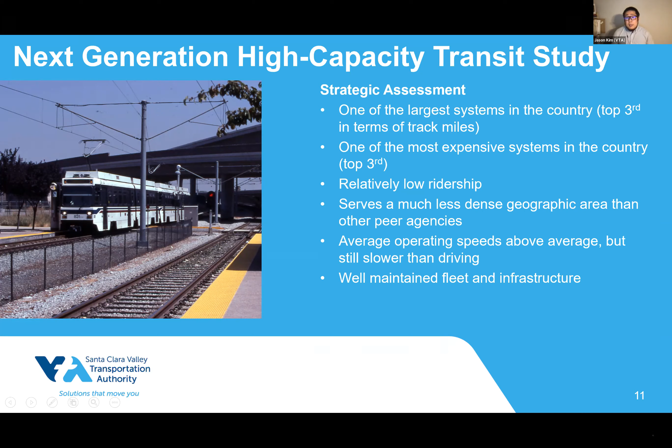All this is to figure out how technology is going to help the VTA system going forward. I think the thing that we're all interested in and excited about is automation. When we expect trains and buses and other vehicles to be operated without a driver, without an operator, whenever that happens, that's going to help us improve our operating costs because we no longer have to pay for an operator. It may also help us increase how frequent our trains come because we can operate more trains since we don't have as many operators needed to fulfill those needs.

But it actually may not help in a couple other ways. It probably won't actually help us increase our ridership, because ridership is heavily dependent on the land uses around the system. Someone mentioned Reid-Hillview, the potential development there. Once that expands, that will actually help ridership for the Eastridge extension. That's the kind of development that we really want to see up and down our entire light rail corridor.

We also don't think that changing to automation is actually going to help our system speeds. The key is that a lot of our slow speeds throughout our county are due to all the at-grade intersections we have that light rail crosses. One of the great things about the Eastridge extension is that it's fully grade separated. So the actual light rail speeds on the extension are going to be some of the fastest throughout our entire light rail system when it's built.

For the actual timeline of implementation we're looking at, the typical useful life of a light rail vehicle is 30 years. That's the anticipated amount of time you're going to have your light rail vehicle before you essentially have to get rid of it and replace it with something else. We bought our light rail vehicles around the year 2000, so we're anticipating 10 to 12 years of additional life from today in our light rail system.

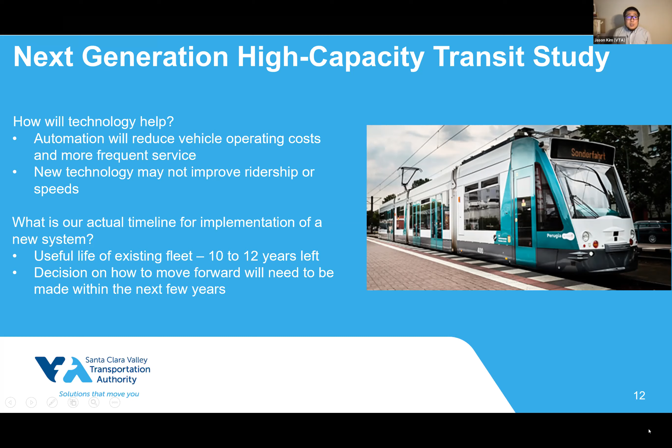If we go to the next slide, I now want to switch gears and talk about technology, some of the technologies we're looking at as part of this. We focused our technology review on existing modes like bus, light rail, automated guideway transit, personal rapid transit - those are the kind of things you'd see at airports as airport people movers. We also looked a lot into emerging technologies that haven't really been used other places, which some private companies are proposing throughout the country and throughout the world.

One of the key things we looked at here, as I mentioned before, is autonomous operations and how soon some of these different kinds of technologies can offer autonomous operations. One of the keys for us is that recently the city of San Jose put out an Airport, Diridon, Stevens Creek Connector RFI - a request for information - which had a lot of these larger companies submitting proposals about how they would potentially create a connector to connect the airport, Diridon, and Stevens Creek.

Some of the notable names in that were the Boring Company, which submitted something for us to look at, and Hyperloop submitted something for us to look at. So there was actually a lot of technologies that submitted, and we took a lot of that information away to help us figure out what technology trends we actually think are coming up.

If we go to the next slide - some of the keys for VTA is that the trends we're seeing with the industry is that most of these innovative technologies, like Hyperloop and Boring Company, are offering fully autonomous operations, but they require full grade separation. You need completely different corridors, and they can't actually just operate on the roadway how our light rail operates today.

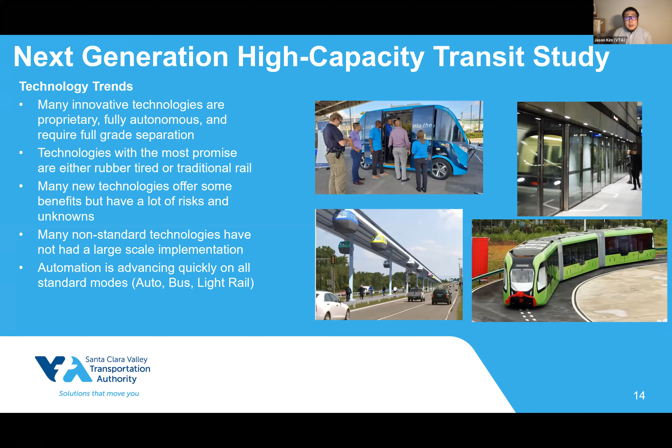So if we go to the next slide, I think all this being said, what we're seeing out of the study is that there's no single brand new mode that sticks out to VTA that checks all the boxes for us about how to move forward. There's actually a lot of different modes that would make sense for VTA to move forward with.

This includes just keeping with light rail and buying new light rail trains, or maybe even converting the light rail corridor to let buses operate on them. These standard modes like bus and light rail are really the things that meet VTA's purpose and need for the light rail system the best.

As I mentioned before, a lot of these newer non-standard modes offer way too many risks for VTA right now to think about. But I think one of the keys here is that we don't want to completely ignore these modes. These are things that we want to keep studying.

Even though they may not be right for VTA's near-term implementation, which I mentioned is about 10 to 12 years from now, they may be ready for future consideration, when we go through this whole process another 30 years from now or so.

As I mentioned before, autonomous operations are really going to come to all different modes that we're seeing. So we're not really considering if a mode or technology is autonomous or not as a big differentiator on whether we should choose it, because we really think these kind of autonomous operations are going to come to everything.

I think some of the keys here for the Eastridge extension is that we're not recommending to move forward with some completely brand new technology that is incompatible with what we're operating today. We don't really see the merit in that.

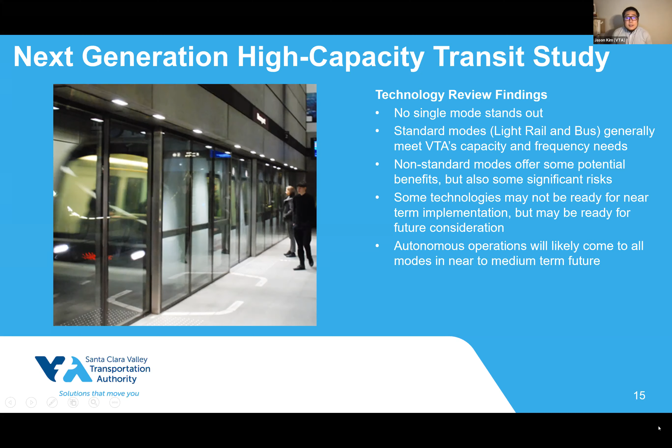With that, I think I really want to talk about the next steps of the study. So David, if you go to the next slide, the next step is really the scenario development process, where we're going to put together a handful of scenarios for the VTA committees and board to consider about how to move forward. Essentially, these scenarios are going to detail ways that VTA can replace, upgrade, and integrate a new or existing mode into VTA's light rail system.

An example of this is we propose VTA just buys a new light rail fleet, replaces the old fleet with new vehicles. This is what the transition timeline looks like. Another possibility is figuring out a way to operate buses and light rails on the same corridors. This is the kind of construction that would need to happen in the first couple of years. This is how many buses we need to buy. Those are the kinds of things that we're looking at as part of our scenario development process.

These are currently being developed, and they should be presented to the Capital Program Committee sometime in early 2021. After that, we'll bring it around to some of the other committees, come back, refine some of those scenarios, and then we're hoping to have the final report complete by spring to mid 2021. And with that, I'd be happy to take any questions.

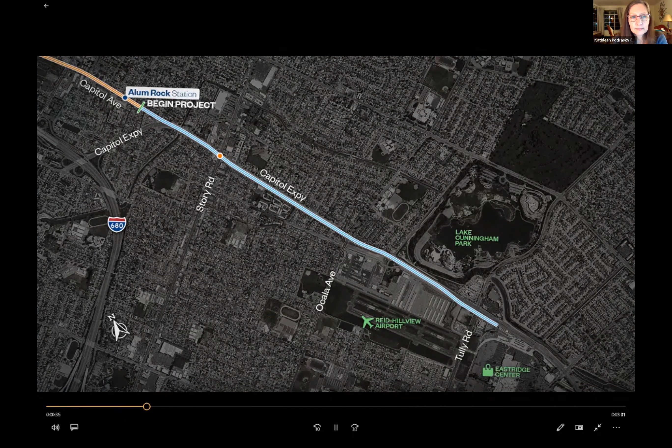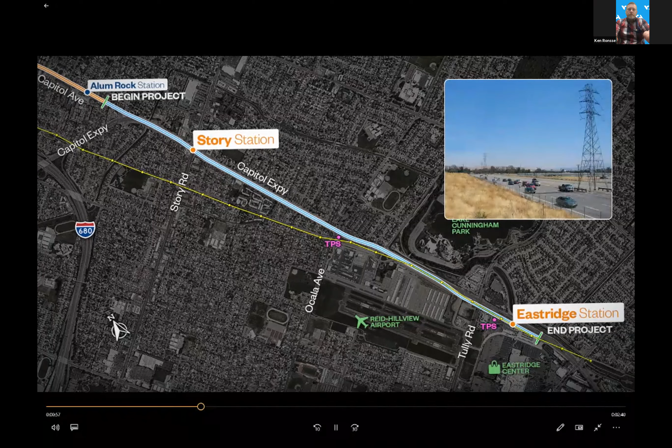The project features include an elevated guideway along Capitol Expressway and an elevated station at Story Road, a street-level station at the Eastridge Transit Center, and two power substations located near Ocala Avenue and Eastridge to provide power to the rail system. A high-voltage PG&E transmission power line between Ocala Avenue and Quimby Road will be relocated from the median to the east side of the expressway to provide room for the aerial guideway.

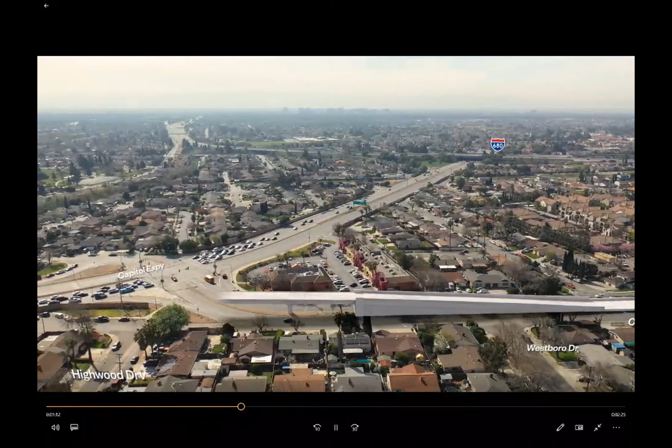The extension begins south of Alum Rock Station and gradually rises along the retaining wall near Westboro Drive, before crossing over Capitol Avenue to an elevated guideway within the median of Capitol Expressway.

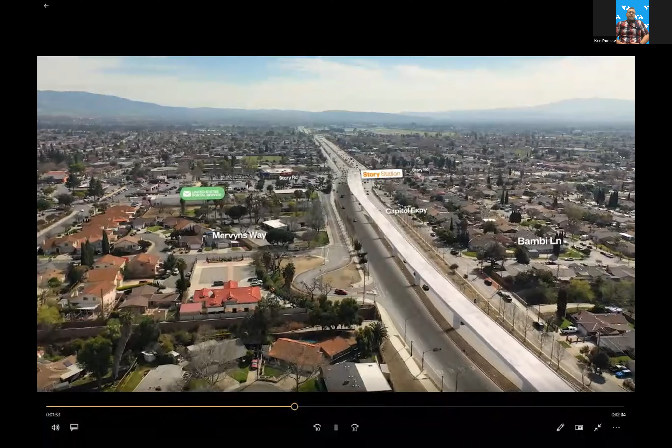The alignment continues via aerial guideway toward the Story Road intersection, where a new elevated station will be accessible from both sides of Capitol Expressway by an arched-shaped steel pedestrian bridge.

The Story Station platforms can be accessed by stairs or the elevator, located on the east and west side of the Capitol Expressway that connects to the pedestrian bridge. A center elevator connects the bridge to the station platform.

The extension remains elevated from the Story Station as it continues south within the median of Capitol Expressway. After Cunningham Avenue, the alignment shifts to the west side of Capitol Expressway, heading south towards Tully Road.

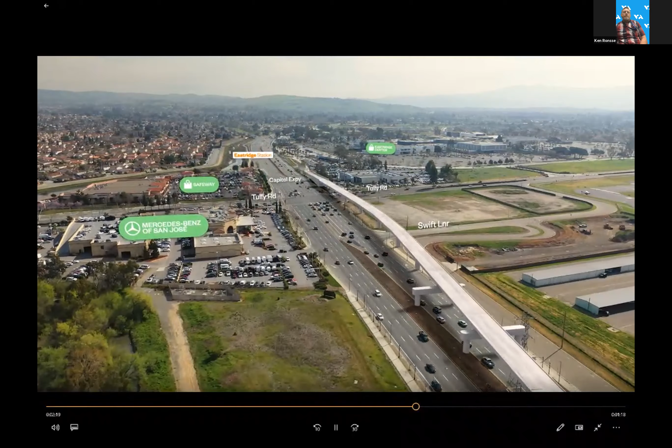As it approaches the Eastridge Transit Center, the alignment crosses over Tully Road on the west side of the intersection before descending to Eastridge Station.

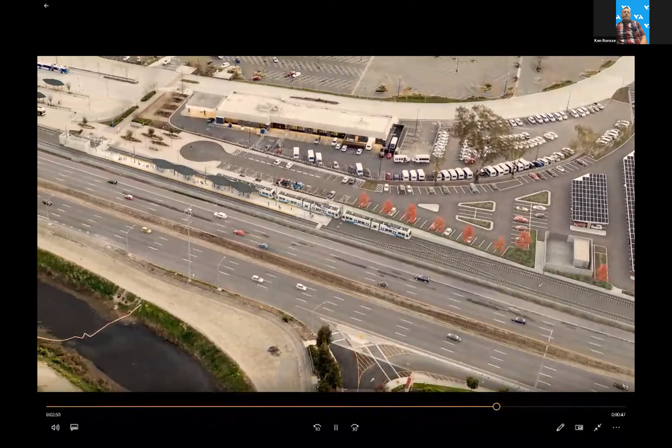The Eastridge Station is a 3-car length center platform at ground level. Access to the platform is controlled by pedestrian gates, located at the north and south end of the platform. The Eastridge Station provides convenient access to the existing bus transit center and park and ride lot.

South of the platform, storage tracks can hold up to 9 rail cars to address peak commute demand.

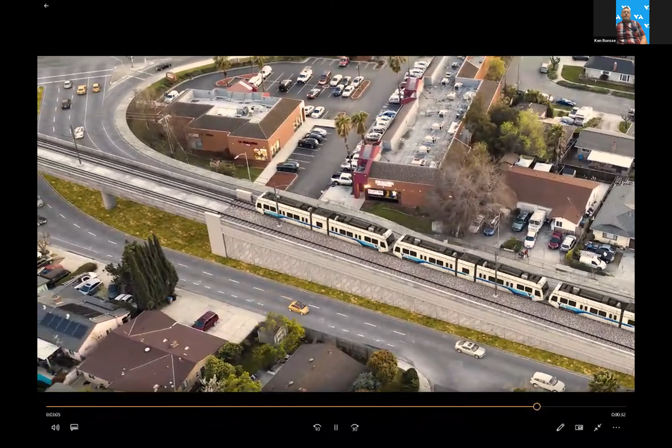The Eastridge to BART Regional Connector Project, when complete, transforms Capitol Expressway into a multimodal boulevard, offering safe connections to BART and other regional transit systems.

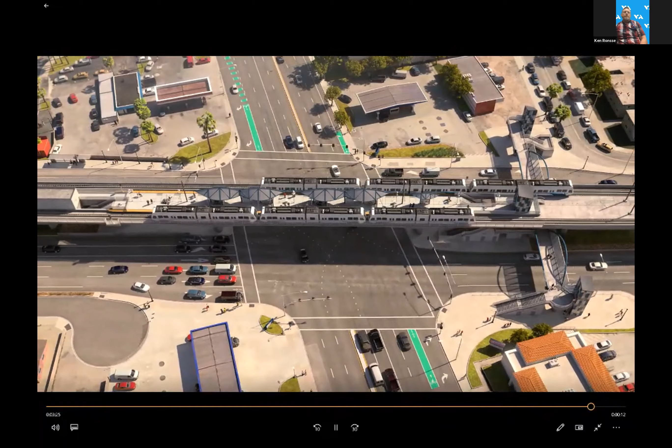That was actually less choppy than in our practice runs. So maybe Zoom in the evening is much better than Zoom during the day.

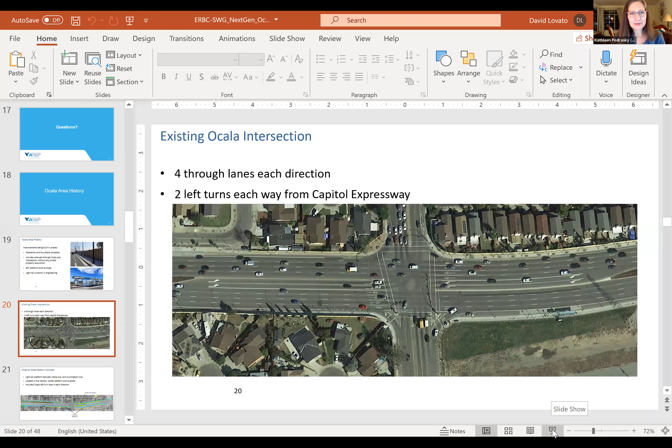Thank you, Ken. So what do you think? Pretty cool. I have one question.

I noticed the person who did the audio did not pronounce Alum Rock correctly, so you might want to change that. Yeah, so typically when people are not from the general area, they don't pronounce words correctly.

Yeah, if it can be changed, there's a couple edits. It was noted. Okay, all right. Yeah, it's kind of like listening to Siri.

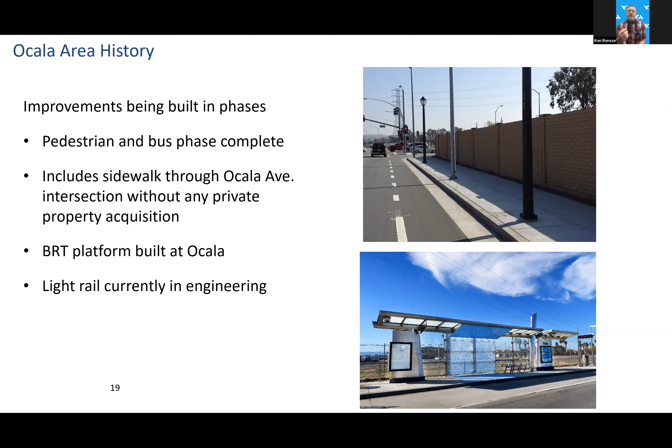So in order to understand the challenges, what we thought we'd do is walk you through some of the graphic information, the exhibits, so you're not just hearing the words and categories, but actually able to walk through with us what we struggled with as a project team, and what the board struggled with in making decisions.

So this is the existing condition today. There are improvements, houses on 3 of the 4 corners. On the lower right-hand side is the area near the airport. We're looking at this with north to our left, south to our right. Look at the left turn lanes - there's 2 in each direction in the current condition.

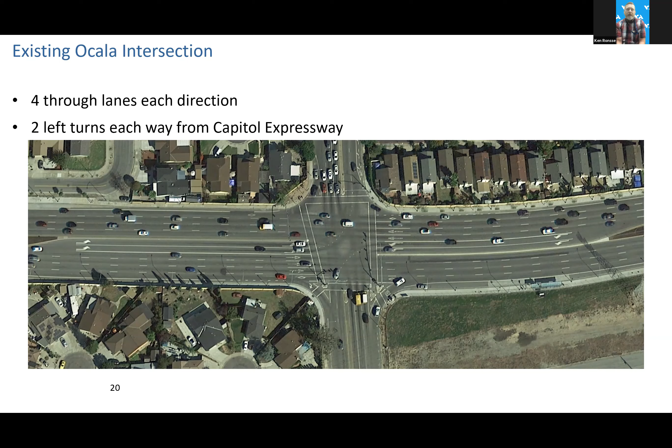So this was the original design. It did have an Ocala platform, located in the median between Ocala and Cunningham, and it had a significant amount of property acquisition. It also had only a single left turn lane in the northbound direction - today there's 2. It took property acquisition of a whole litany of houses on the west side and north side, the northwest corner. That's what was actually approved in the environmental document. That's how it started.

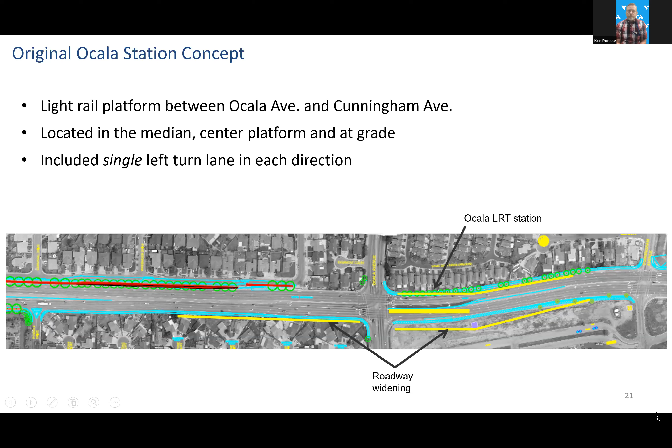The photo on the right shows the property acquisition. It shows the removal of backyards - only about 3 to 4 feet will remain from the new sound wall for several of the homes. As we said, there's only 1 left turn in the northbound direction in this scenario. And those were the impacts.

The value for the project was the ridership. The ridership was estimated at 250 boardings per day. That did not include the Reid-Hillview Airport closing and reconfiguration plan - I listened to the full board meeting, stayed the whole time, and heard the comments and the action, and it did not include that. Even today there's no formal plan about what that development would look like. There's questions about it, and likely it would develop, but there's questions about what it would look like. It's true none of that was evaluated in this ridership, but we're an order of magnitude off.

In our sustainability policy, we have a minimum criteria for a new light rail station: 600 boardings per day. What we're saying is, if we do not receive 600 boardings per day, that station is not sustainable. We don't even mean the construction cost - this is construction cost aside. We can't afford to operate and maintain a station unless there's more than 600 riders per day. This stop had only 250 boardings a day. Granted, that didn't assume any development at Reid-Hillview, but the ridership was low.

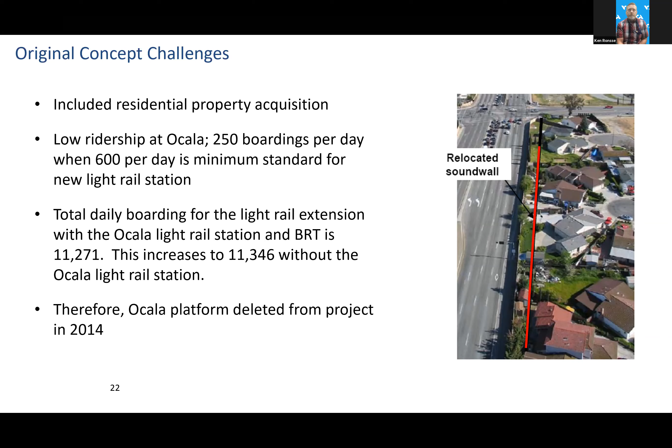So the story continues because it doesn't end there. After 2014, we decided we needed to update the environmental document again to ensure we had good traffic information, and that the document was updated because it had been going through some changes. So we were faced with the other half of the challenge.

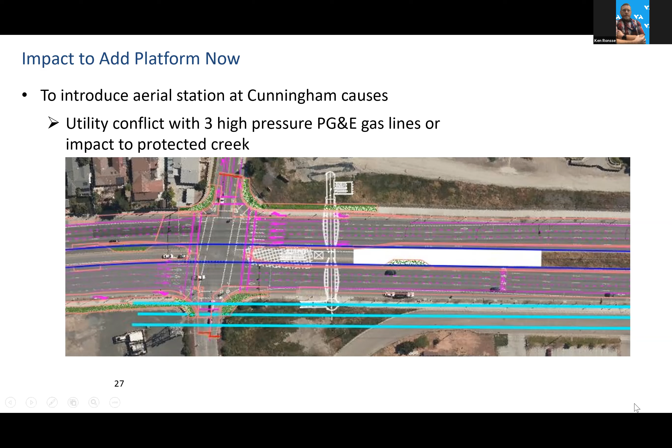Then the challenge comes to this: if we were to put a platform in, what is the appropriate space for the platform and for stations? And Jason, who's a planner, knows better than I do, but as we said early in the presentation, ridership actually goes down when you add a platform—think of First Street. Ironically, if we were to get rid of stations, ridership would go up. If you could speed up light rail by not stopping at stations and be faster, more people ride it. So interestingly enough, you start to have a challenge.

So what we're showing here is that if you take the middle of the property, and the airport were to develop—using that as a measure, and I appreciate there are other properties outside the airport that would use Ocala Station, but equal distant to our left is Story—if you take the new development at the airport, the distance to Eastridge platform and to Ocala platform, if it's all the way to Ocala, is equal distance from the middle of the property. If you move it to Cunningham, it's even less difference.

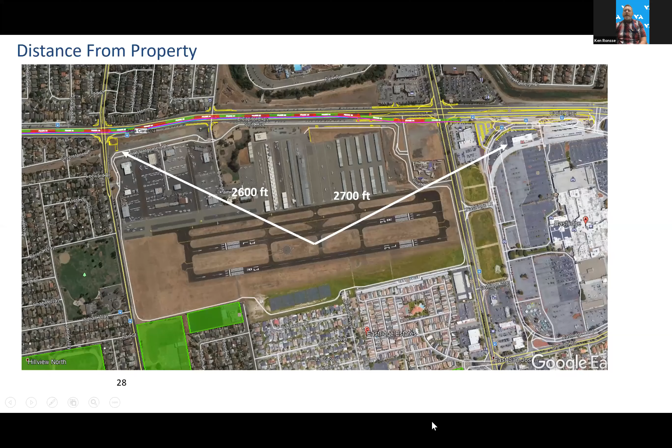And I guess I would say, I think there's two parts to it, Craig. So if we were to go back, can we go back a couple slides? And then I would like to share my screen if I could at some point, because I have a couple of graphics on my screen. So if we go back a little more.

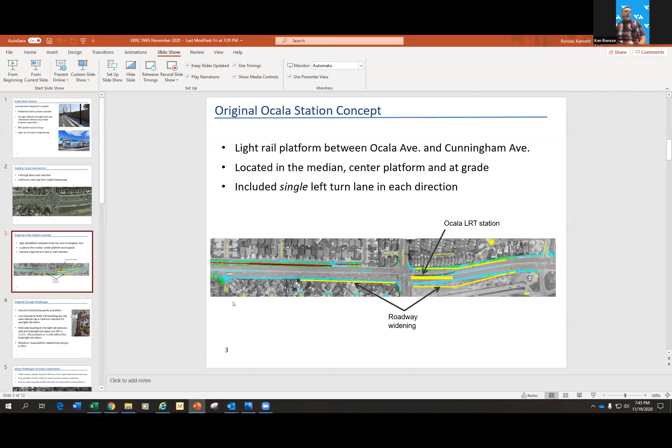So let's just say, for the sake of argument, that the ridership is extreme and there's a lot of ridership. The board would still have to decide then, is it worth putting a station in to take all these homes, or take away 2 left turns when the distance for those homes is roughly the same distance as Eastridge? And that's the struggle that the board has, is that to add a platform is a great thing. An aerial station is a great thing, but it doesn't come without a cost.

And that cost is not just money. We haven't even talked about money. I mentioned 25 million, but I'm not even talking about that. What I'm talking about is there's a lot of people that would say, you may want that platform, but these are our homes. And others might say, if you don't take our homes, that's fine, but I like my left turns. The problem is you can't have an aerial station without deciding which of those you want to take away. It's not possible.

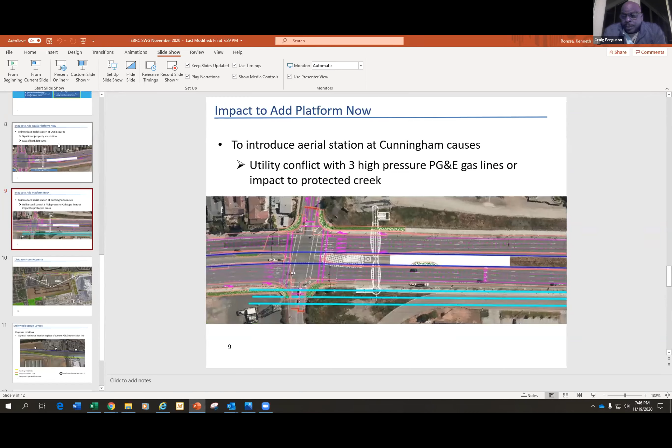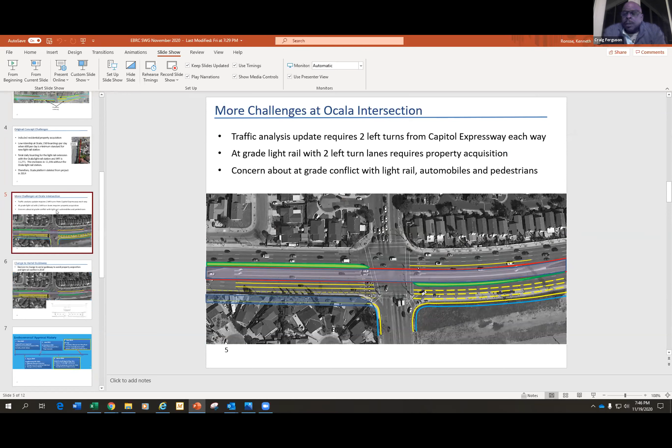Ken, I realize this is difficult, not an easy decision to make. For one, I'm glad I'm not the one who has to make it, but I'm advocating for the community. The supervisor will have to make that decision, but I feel strongly it's needed. The other participants can jump in and let me know if they think it's way in left field, or if it's a necessity as well. I know there's some people we can't see, and I don't live in that area, but I'm advocating for the folks who will be in that area.

Craig, I think that's actually—so what should the process be, maybe? Staff, I don't think our job is to try to convince anybody of anything. Our job is to present the circumstance.

What the board was faced with so far was a ridership of 250 against a criteria of 600. I'm not a modeling guy who does the traffic models, but there is no approved project now for the airport.

What they talked about Tuesday was agreeing to develop a plan that would set the approach for how one might decide what a new future would look like, if there is going to be one. They would set the plan, and nothing would happen until 2031. So we know that's kind of the fact. But let's assume there's going to be a station there—a build out of a development.

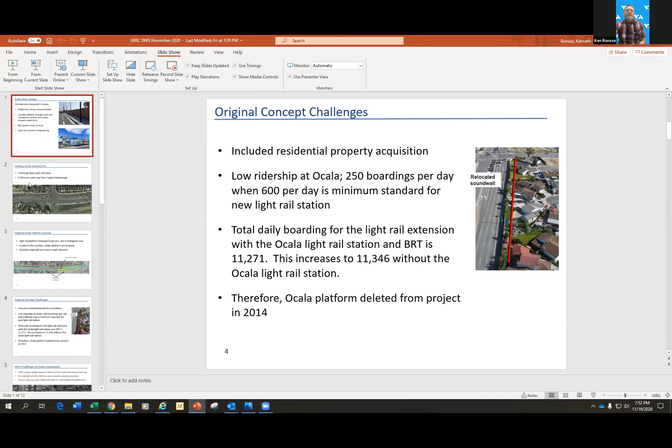Okay Ken, thank you for your presentation. First, just to go back, this project has been going on for what, 20 years now? So there's been delays since day one. Secondly, I think all this is affected by where we're going, but my main concern is what is the difference between the Story location versus the Ocala location besides the home acquisitions?

Number one. Number two, in the Story location, has anybody taken into consideration the activity that goes on there? For me, that's a big one, because if I had to catch the light rail and go down to that station, I don't know how I would feel getting on and off there, knowing what goes on behind those apartments in the corner there. I can't even remember the name of them, the Knox or whatever, the apartments that are there in that corner area.

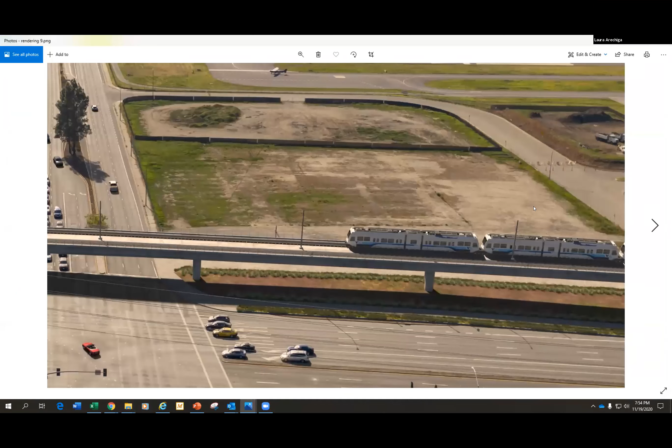There's a lot of activity that apparently goes on there. I need a clear explanation from you in order to sell that to my group of neighbors, because some of them would use that particular station. I'm sorry, I'm confused, which location? I think it's the Colmar Apartments area right there. That's the location where the station is going to be. Isn't that correct?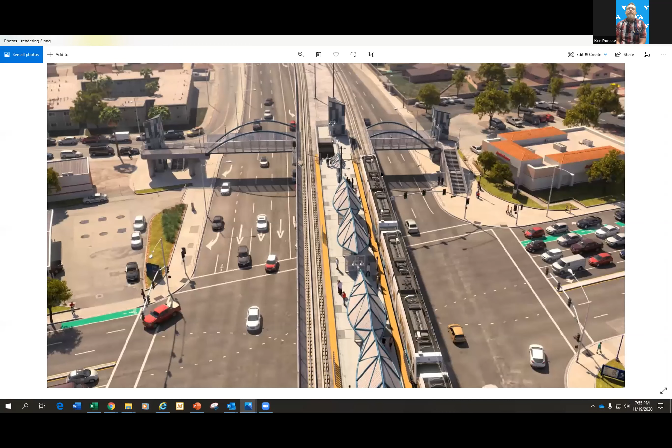Yes, so the station is on the right side of this screen. The station is right here at Story, with the overcrossing on one side touching AutoZone, and on the other side near the current supermarket, or the gas station and the gas market. So this is the orientation for the location of the Story median station.

And that's where my concern is, because the apartments right behind there, there's a lot of gang activity, number one. There's a lot of shootings there. I mean, there's just a lot there. And only because I know people that have lived in that particular area that have had to leave. That's my main concern, is safety, number one, and lawsuits, if you're going to be spending all kinds of money.

Because you're concerned about the land acquisitions and changing the whole thing. If that's what the board is concerned about, they need to be concerned about lawsuits that are going to come into place if somebody gets hurt in that particular area. That's a big thing for me, safety. Yeah.

That's something we can share back at the PAB meeting next month. Yeah, because with all the conversations and meetings we've had, nobody has ever responded to the fact that safety was a concern. It's just, wait a minute, let's just plop it right here because we don't have to acquire any homes, we don't have to spend any more money.

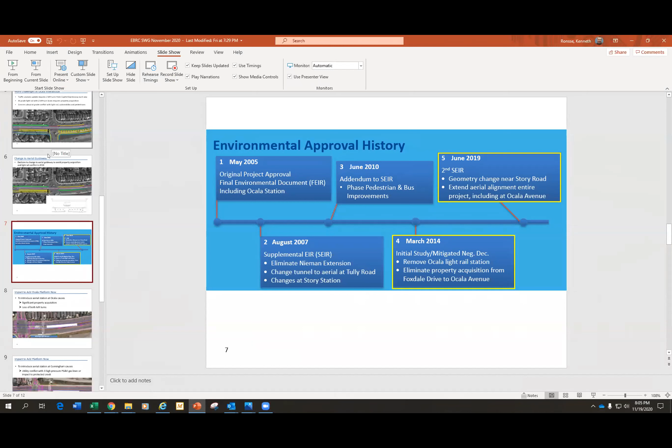So you guys have a small room right there to make the station. If you make the station in Ocala, I don't think you have to, like what you say, buy houses and things like that, because you're not going to need that much room to make the station there. And also, if you guys move the stop or the station for the bus stop right there, you don't have to buy any houses right there.

And also, for me, because I've been walking my dogs almost every day there, Ocala and Capitol by Eastridge, I see that when they open those two lanes to make a left turn or right turn, whatever, the traffic doesn't respect pedestrians there. The traffic is so fast and things like that.

You guys should stop or cancel one or two lanes there, one lane, make a left or something like that, make turns. Of course it's going to be low traffic, and there's going to be more people there getting the bus and things like that.

And you're talking about the amount of people getting the bus there. I don't know when you guys got the number of people, something like that, but I see many people there. And also, you try to get the bus, or for Story Road, for the train, or Story Road or Eastridge, to get a bus, you know how much time it takes you to wait there for the bus? 15 to 20 minutes. And it's a long time for people going to work or things like that.

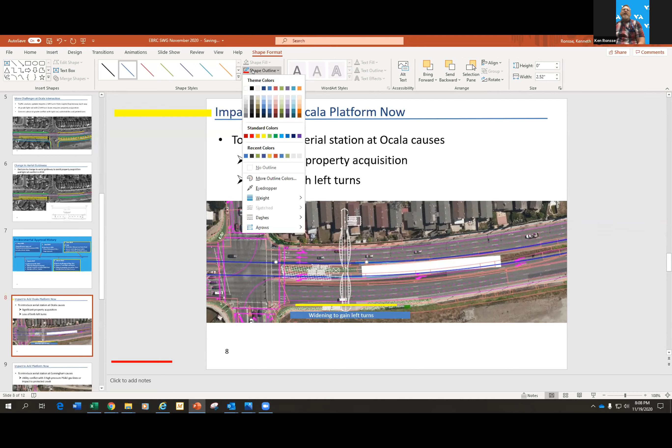Okay, so what I'd like to do, if you'll just indulge me, the most important thing to me is not where you land, but that you're informed. That's what I care about. So I want to talk about a couple things I just heard to make sure you're informed. Is that fair? Sure. So I'm going to walk through real quick, forgive this, but I think I'll try to take advantage of this opportunity to show you.

This is not theoretical, this is actually the aerial. This is actually our line work for the light rail. This is actual design. Everything that's not white is the actual design today. We took the actual design from Story Road, which is the minimum width, and overlaid it with the white. So everything here is actual.

If we were to bring the station at Story and copy it down here at Ocala, this is what you would get. Here's the challenge: this yellow line I'm bringing in, that is the median of the road with the station.

There are no left turns. The left turns are gone. You can't fit them in. The current alignment with no left turns, this is the curb, this thing right here is the curb, right there. Let's assume you want the station, and you're okay with no left turns. Okay, then you're fine, because the other side of the road is right here in the red.

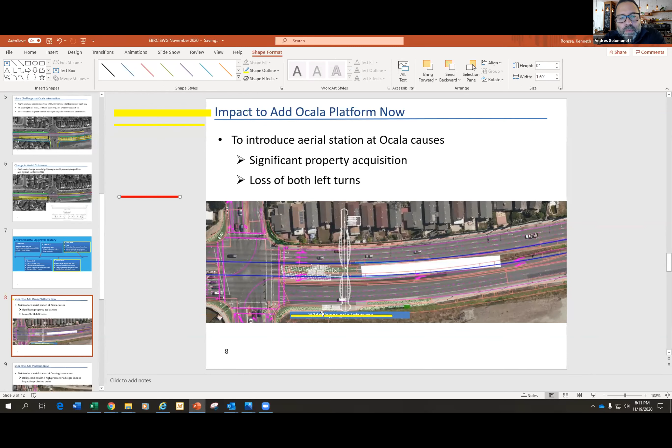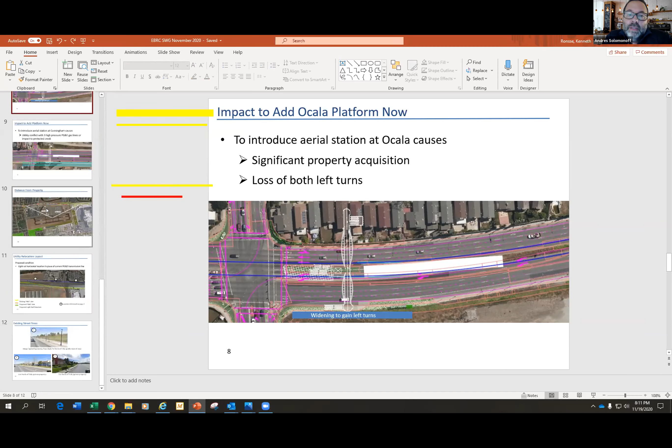Andres: I don't have a question, I just want to express an opinion. It seems to me like implementing a shuttle bus, a dedicated shuttle bus at Ocala, would make a lot more sense, just because of the complexity of putting in a light rail station there, and the unknowables we have. We don't know how big, and we truly don't know whether Reid-Hillview Airport is going to be closed, or how big the neighborhood there will be. Having a dedicated shuttle bus that runs maybe every 15 minutes to either Eastridge or Story makes more sense.

And then the second thing I wanted to say regarding Laura's concerns: I would frame it as an issue for the police and not the VTA. I'm not going to have gang members telling me or telling the VTA where to build the station. I would present it to your community members as something the police need to address.

I have already addressed it to the police at prior meetings, but I've never received a clear answer. That's why I want to know from the board if that was also part of their environmental document. That's where I'm coming from.

Okay, and we can point that out. I don't know the answer, but safety is a part of it. So let's pull that out and make the environmental document available to all of us. And if you want, we can maybe walk you through the environmental document as part of one of these meetings, just so you know what's in it, how it's made, what the components are, and that you're fully informed. We can do that, walk you through it, make sure you have a copy, and guide you through it, because that is our job, right?

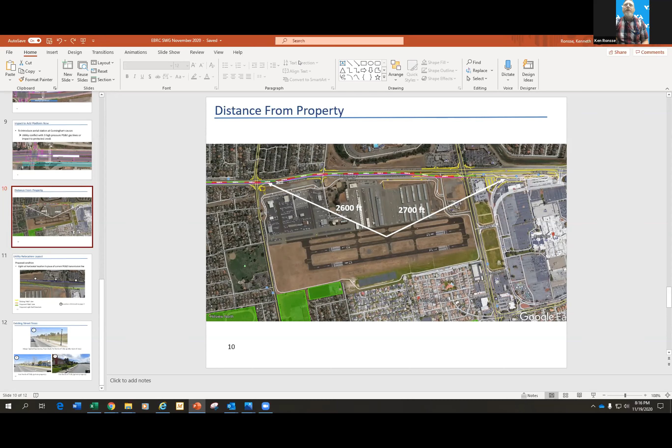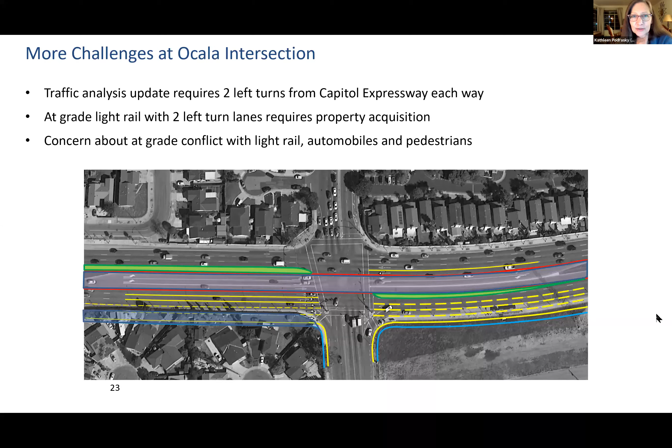I'm here. Okay, guys, I did make a note about sharing the environmental document, and I do have it. If you've gone to our website and saw the tab for the stakeholder working group, I have a tab just like that for the environmental documents, so I have them in order. If you go to the documents page, they're listed by type, and it's a little harder because you have to know exactly what you're looking for. So I prefer to have them in order so you have an idea of when it might have occurred—that way if you don't know what you're looking for, you can go by the when.

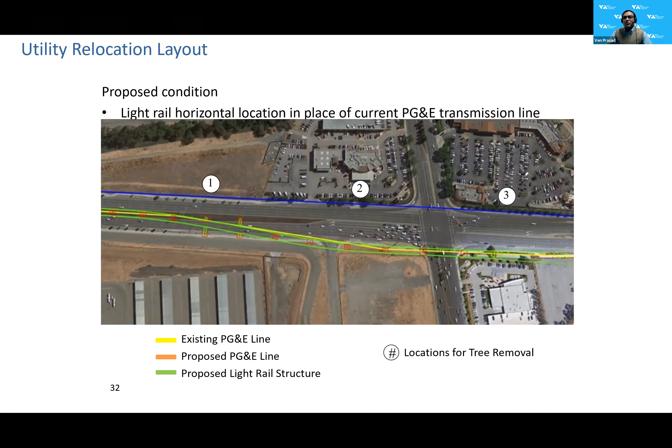So if you see, 3 is to the south of Tully, 2 is to the north of Tully. I want to go to the next slide here and explain more on this one.

So like I said, we are relocating the transmission line to the east side of the Expressway. PG&E's new requirement, because of all the fires they've had over the years throughout the Bay Area and other locations within California, is that we cannot have any trees under their transmission line. So on the east side, what you see in these pictures 1, 2, 3 are the locations where we have existing trees, and PG&E has been asking us to remove these trees. We're looking at somewhere around 50 to 60 trees that need to be taken out as part of the project.

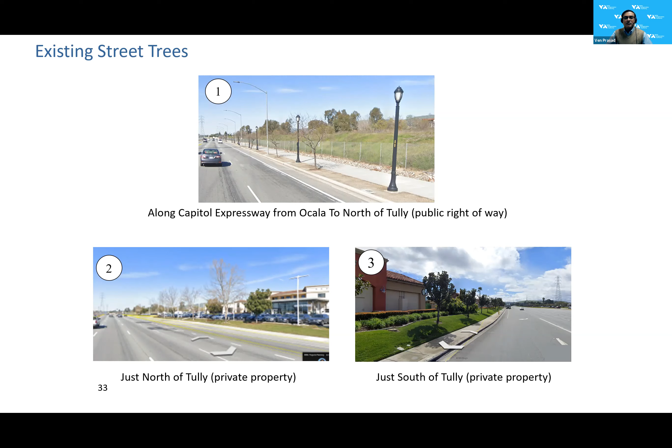So we are still negotiating with PG&E to see if these could be saved, and as we speak, we're still talking to them at various levels. This is all a new development that has come up in the last couple of months, and we'll continue to negotiate with PG&E on this one. Next slide, please.

I want to mention, speaking of trees, in our previous meeting we had talked about some of the trees that are going to come out as part of the project. It was not an easy decision for us to take those trees out, but because of where the footprint of the project is, we had to take it out. This happened with close coordination with an arborist and the engineers. We had a team of people determine each and every tree to see which one we can save and which one we cannot. So we have to take some trees for the project.

Also, it is all documented in the environmental document.

I want to go to the next one, which is coming soon. If you could go back to the previous slide please. I want to mention about the advance minor construction here. The anticipated construction duration is about 2 months for this one. The work needed there is because of the widening of the road, we have to relocate the utilities. Before the utilities could be relocated, there are some things that need to be cleared. There are a few trees that had to be taken out so that the boxes you see on the ground could be relocated for the project.

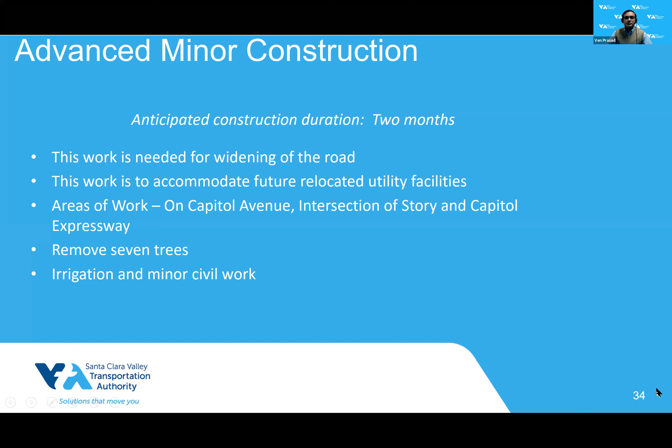So I mentioned about traffic last time, and Ken did discuss about the traffic also. We will be regularly coming to you and giving you updates on traffic. We have worked closely with the city and the county for the last 3 years during the design, looking at how best we can keep these lanes open, especially during peak hours, while building this project. You now have an idea how much extent of construction is required for this project, building a bridge, how much area we need, and we understand the traffic on the Expressway needs to continue to operate.

So we'll do our best to minimize the impacts on Capitol Expressway in terms of traffic. There is some night work on this project where we'll be completely closing the roads at night. You may have noticed the bridge in the middle of Capitol Expressway is going to transition to the west side of Capitol Expressway, just to the south of Cunningham, right in front of the airport. That kind of work has to happen at night because of safety and the room required to build a bridge. We'll be closing the expressway for this kind of work, and when we close it, we will make sure we have proper detours.

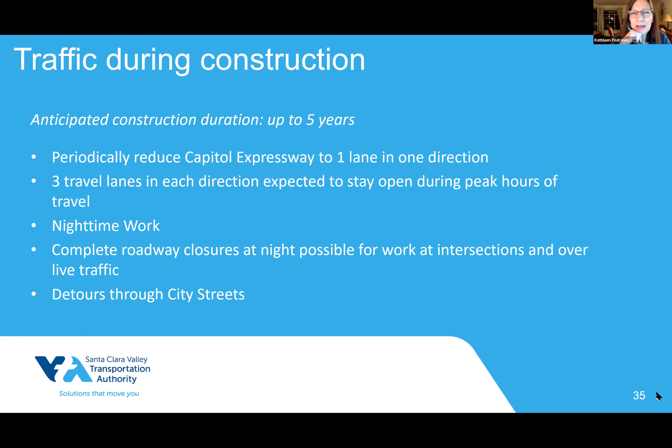Thank you. Any more questions? Okay, let's move on to community outreach, and I'll try to blow through this.

You guys are such troopers. I'm freezing. Julie's all bundled up, so she's like me.

For community outreach, I have a stakeholders working group member survey that I'm going to send out to you. It's a really short survey with basic questions, sent through SurveyMonkey. It's basic because you've been asked to help share accurate information with stakeholders, and part of this is to help me create content that makes sense for them, and also how it's shared.

For example, at the last meeting Sandy mentioned that in her neighborhood not everybody is connected to the internet, so Nextdoor isn't the best option, but door hangers and mailers work. So these are just basic questions to learn more about your outreach, questions about the groups you represent, how often you communicate with them, and let's think maybe not so much about the pandemic issue, more pre-pandemic, what we're hoping to get back to at some point.

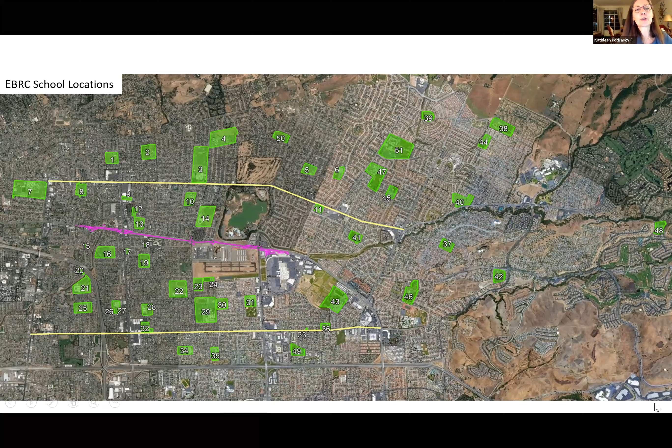Did anyone have questions about the schools? I just went through that.

Good, okay. Kathleen, this is Sandy. Hi Sandy, I have contacts at Alum Rock Unified and Eastside Union High School District. I'm so calling you. You work at one, don't you? Yeah, Eastside. Okay, thank you. I'm calling you. Okay, great. I love this - this is how we get there.

Okay, so future topics and the work plan through 2021. This can be flexible, but based on the project schedule, the staff and I - Ken, Ven, Hassan -

Thank you, Laura, I just got your text. Thank you. Laura has a contact too.

We developed a work plan going forward. You can go to the next slide. I'm sorry David, thank you. This is what we think you need to know. Let me just get this off my screen a little bit so I can see all of you better.

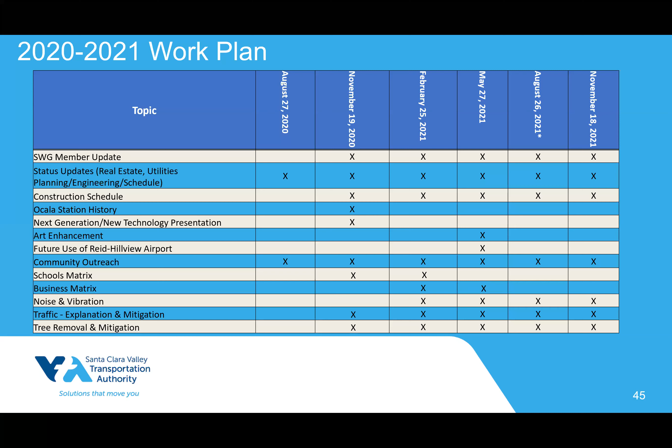I'm sorry, yeah, that's what gets me in trouble when I forget to spell it out. Go ahead, Julie. Julie, were you raising your hand? Oh no, I was showing him 4 o'clock.

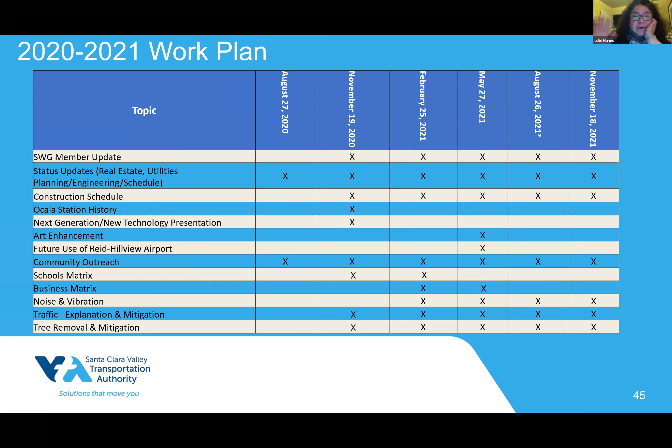4 o'clock. Oh, everybody have a wonderful Thanksgiving. Yes, yeah, so I think we're good.

If we're done, you guys know you can reach me anytime - well, not almost, within reason. I am taking most of tomorrow off. I will get the survey out on Monday.

Want everyone to see, there's the next - there we go - wrap up. There is the PAB meeting, there we go, I had it up there. Thank you, David. And then our 2021 stakeholder working group dates, get that on your calendar. Maybe one of those will get to meet in person - that is a virtual meeting, so you're able to do it virtually. Go on our website, under About Us, Committees and Board, and there are the different policy advisory boards. You go on and it'll take you right to the link to launch the Zoom meeting. You can even sign up for updates so you can get notifications to be reminded, just like for the projects.